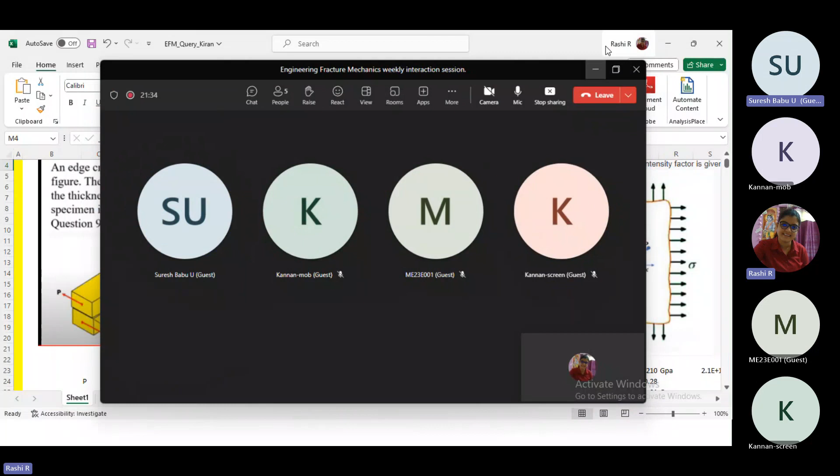Madam, at least the assignment questions also, are you finding it difficult? The chances are very high that I'm making mistakes. Who is this, Kiran or someone? Kiran sent me the one; it was very difficult for me to understand actually. So I understood that I'm making a lot of mistakes even during the teaching. That's why I'll probably take a couple more classes based on assignments only. Two assignments we'll try to complete, the ones which are left. I haven't figured it out because I have a lot of work going on. I'll let you guys know directly in the mail.

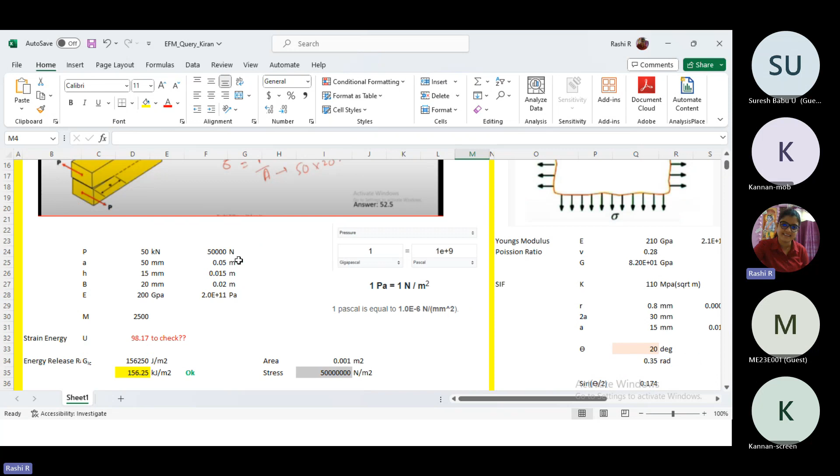I talked to NPTEL, but then I realized it is at least required to have a platform where if you guys have doubts, you can clarify among yourselves. So I thought, fine, I'll take the class. And then I realized in assignment 4 also I was making mistakes. I've made so many mistakes in this also. So let me complete this exam part first.

So where was I? You guys will be getting equations with the data sheet, and in that data sheet you will have all the equations. You will not be allowed to carry any written equations, and the questions will be very similar to the assignments you are solving, MCQs and numerical type. So if you solve all the assignment questions given, and I have other previous assignments also that I can share if you want, approximately 50 to 60% you will be able to score very easily.

And so I asked sir to take one class to clear the doubts. Sir said he will see whenever it's feasible. He was supposed to take at least one class. He said he will take it, and I don't know when. Did sir inform you guys anything regarding that? No, I think so, but he was giving answers for a few questions in the discussion forum, right?

Ma'am, there is a clarification here. So who is responding to our mails? I thought it's you. It is me, and then other TAs are there, but they are from mechanical. I am the one responding to your mails, but NPTEL admin also will respond. Technical responses come from myself or my colleagues, right? Not from sir. So we don't have any mails from sir.

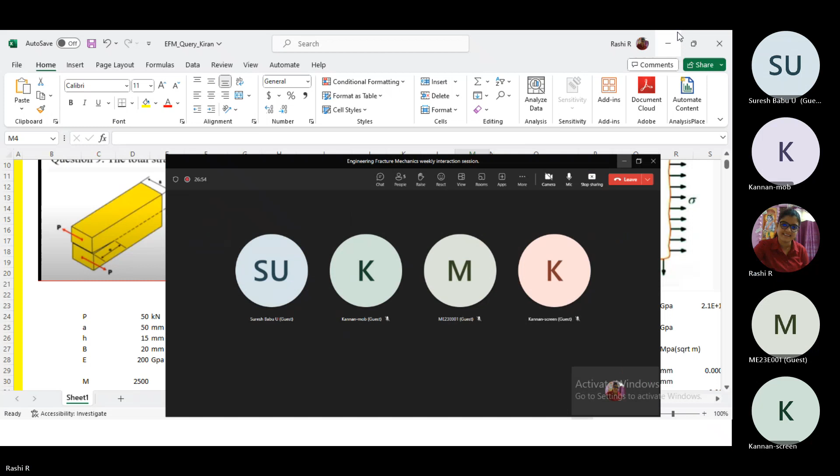In this, I got one clarification - I had a doubt regarding this one. Sorry, ma'am, on the exam part itself - the exam part I completed, right? I'll ask sir to take one more class there.

Yes, good, there are some clarifications in what you told. First thing, you told that they'll be providing some data sheets with the equations, right? Yes, with the equations related to the questions.

Mr. Khan, can you intervene, madam? Yes, please, please. Frankly speaking, I attended last year also, and of course I could not get through. Even me too, Suresh. That's what I'm coming to tell - there actually was no data provided last year.

In the previous semester, this subject was not there, but previously I have attended this. The questions were similar to this assignment itself. Whatever data was required, and some of the critical formulas, they were given in the question itself as part of the question. There was no separate booklet or something.

Like in week 10, some of the questions, actually the equation was also given, if you can see. Similar to that, they gave some of the equations too. Of course, that time I did not take it seriously, I just attended. This time I took it more seriously.

That's what. So continuing from Suresh Babu, we didn't get any data sheets for the questions, ma'am, but there were, as I told, equations for some of the questions, not for all.

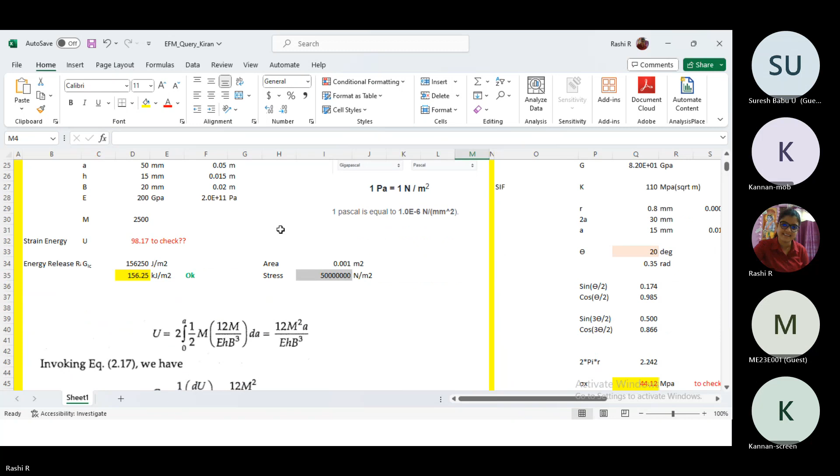Used here in this assignment, for instance, we have to use the problem equation which I have used is not correct. I have used strain energy equation, but we have to use strain energy release rate instead. For this equation we have to first find out... one second.

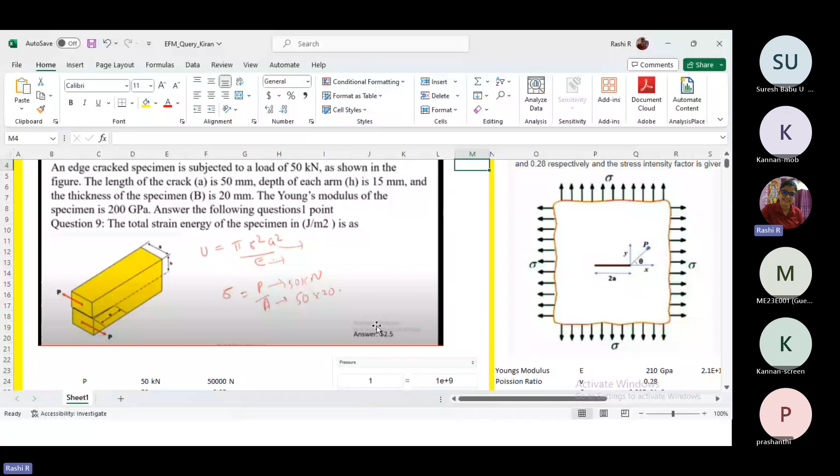So first we have to use strain energy release rate equation, and since the moment is not given, we have to find out moment is equal to P into A, and then we have to integrate it in this equation. Okay, so that's how I realized that I'm making a lot of mistakes actually.

Actually, madam, whatever if I go through the class notes, most of the things are coming from that. Yes, 70 to 80% if I just make it, we have to do the assignment.

So we can do that. Then we will just solve the assignment. We'll try to solve it, and we have previous assignment also. We'll discuss and do it. Then that's all I can do actually, because I'm using the equations in the wrong way.

That we shouldn't find first stress. First we have to find out the moment, and then we have to integrate it, and then we have to find out the strain energy release rate using that equation.

Actually this fourth assignment is very... even for every week, I could able to do it immediately, but I am forgetting the previous ones. Yeah, exactly, that is a problem. When I was doing the fourth week assignment, I was remembering the equations and all, and when I come to sixth week, I'm forgetting what is happening in fourth week. I'm not even able to solve or try to understand what is wrong there also.

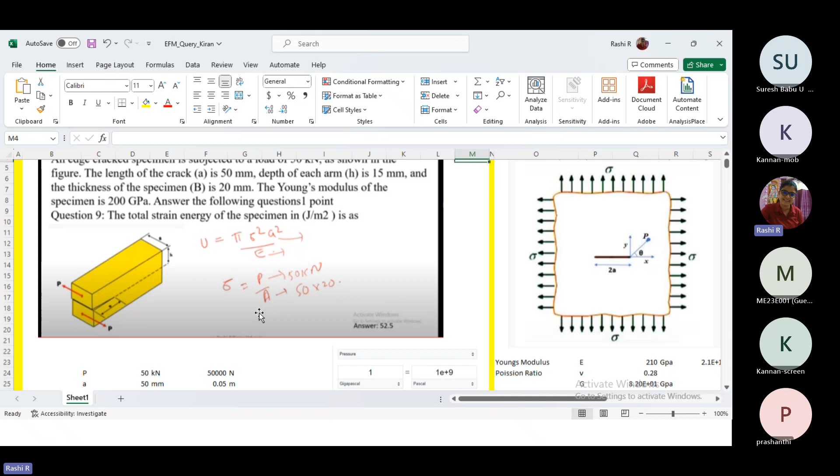So that's where I realized. So that's how we have to do it first anyway, moment we have to use, we have to integrate it.

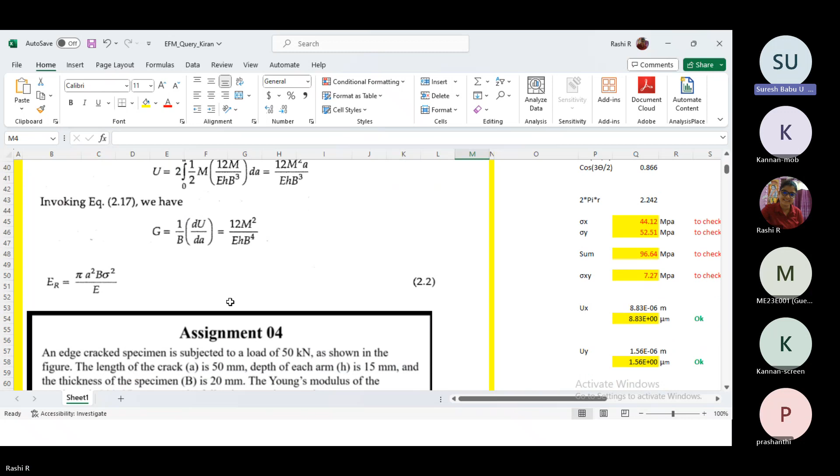Present assignment, I think you are asked not to discuss, is it? Otherwise that may be easy a little. No, you guys can discuss, man. If you guys want, you can discuss, it's fine. The present assignment we can discuss maybe to some extent.

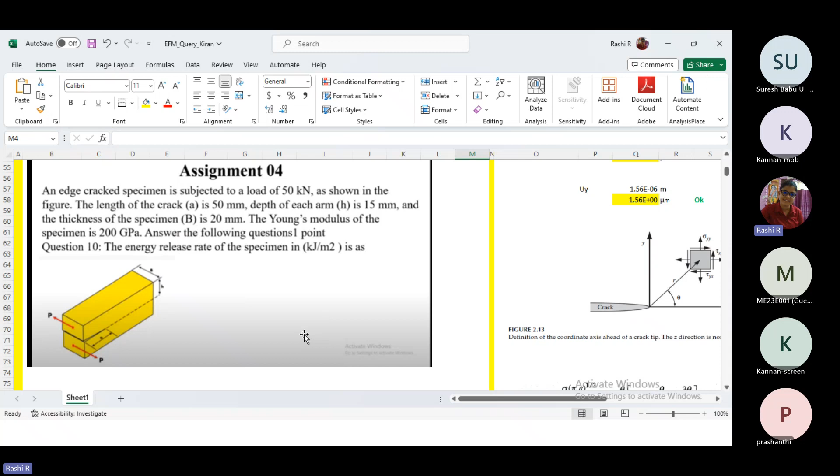I have not prepared though. I just wanted to tell you guys regarding this exam, and then one more thing is here R is in radius. So this was the doubts that you guys had.

So R, radius, is in millimeter, we have to convert it to meters and then do the assignment. So keep an eye on the units when you guys do it. R should be in meters, by the way.

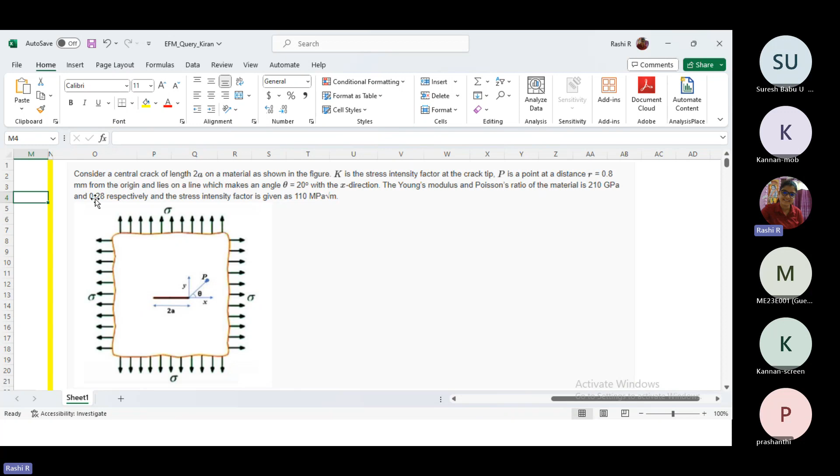Is it really the fourth assignment? This one, I think so, it is fourth or fifth. No, it's not fourth. No, I'm just discussing the problem doubts you guys had. Sorry to interrupt.

Please allow me to tell some. So before going to these assignments and problems, please let us have this session every week. We only have 4 weeks, so please support us.

See, that's what I was telling. I'm really bad at solving because I'm having difficulty keeping track of the equations every week. First I have to go through the complete week, and then I have to probably teach it.

That's what I was telling, we'll solve together. Yeah, that's good. According to sir, if we solve the assignments, about 50 to 60% of the marks we will be able to score. So we will.

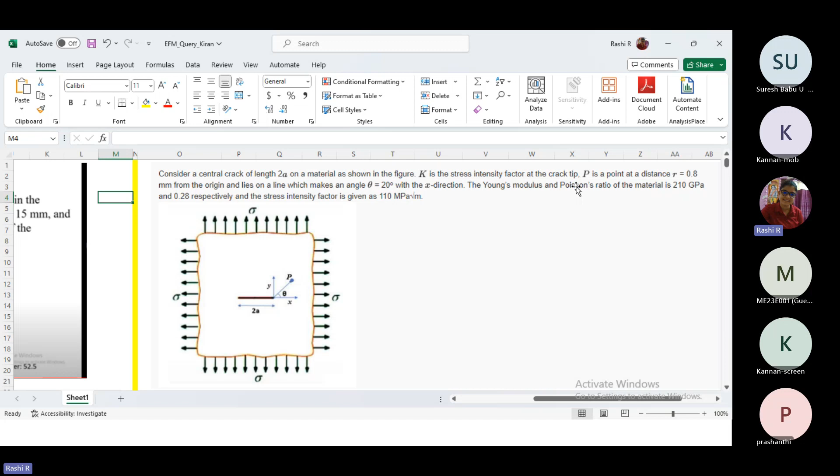I'll take the class, I'll start, and if I'm making any mistakes, I want you guys to please say and have discussion properly, then we'll just solve it in the class only. Because previously I have made mistakes and no one pointed it out, that's why.

Everybody is learning, ma'am. So you guys should be able to do this one at least. Come on, I made a mistake here and you guys kept quiet.

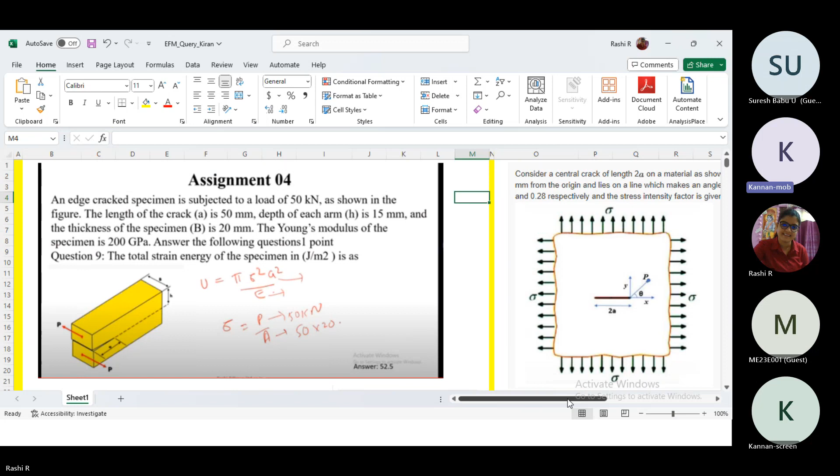Okay ma'am, we'll see ma'am, we'll do it together ma'am. Yes, but that's what I wanted, please. If we can discuss, it's fine. Present assignment also we'll discuss. It's okay, if you guys have any doubts, you can discuss among yourselves.

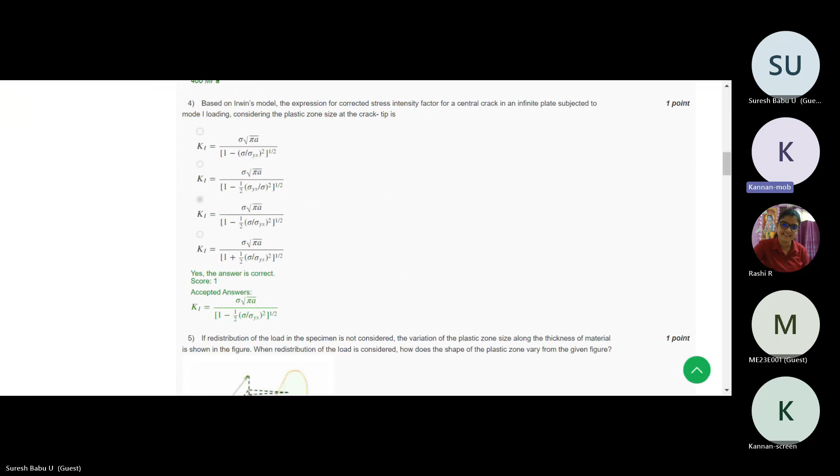Exactly. Yeah, correct. I understand now. Up to some certain thickness, this K1C is more. Fracture toughness is more. That is plane stress. So it's always more than plane strain. So this is how I exactly correlate. Thank you. Good.

Shall I go back? Yes, Suresh, next question. My understanding is right now. Kannan, you were telling something? Yeah, my understanding is correct, whatever I conveyed, right? No, it is correct. Up to this much I can say, but when it comes to equations, I'm lost. I'm sorry. That's okay. I'm lost in each and every question, ma'am. No worries. I'm not changing my answer. Kannan, I don't think so.

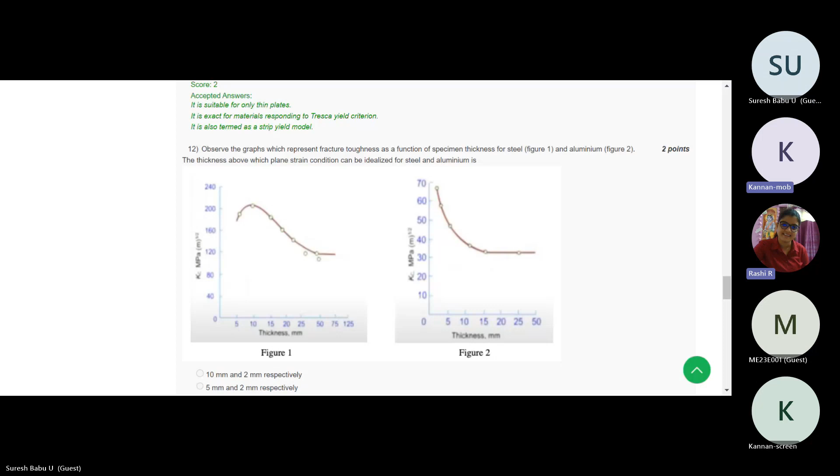Okay, next question. Third is: residual strength diagram for a thin cracked panel is plotted between. It is not seen, Suresh. You have changed question number 3. Are you able to see, Kannan and Rashi? No, ma'am, it's only half. Suresh, connection issue is there. Okay, I will stop sharing and share once again.

Ma'am, to be honest, it takes almost 2 hours to complete the test for me. Week 9 and week 10, it took 2 hours for completing the test. 2 hours, that's it. Kannan, believe me or not, when I was preparing for the class, I was spending more than 8 hours for preparation. That's what we need to do, ma'am. Preparing for a class is different; taking an open book test is different. Yeah, that is also true. That's why we need you. Thank you.

Yes, Suresh. Can you see my screen? Yes, we can see. This is question number 3: residual strength diagram for thin cracked panel. It is between stress and crack length. This plot is plotted between stress and crack length. I feel this is the correct answer.

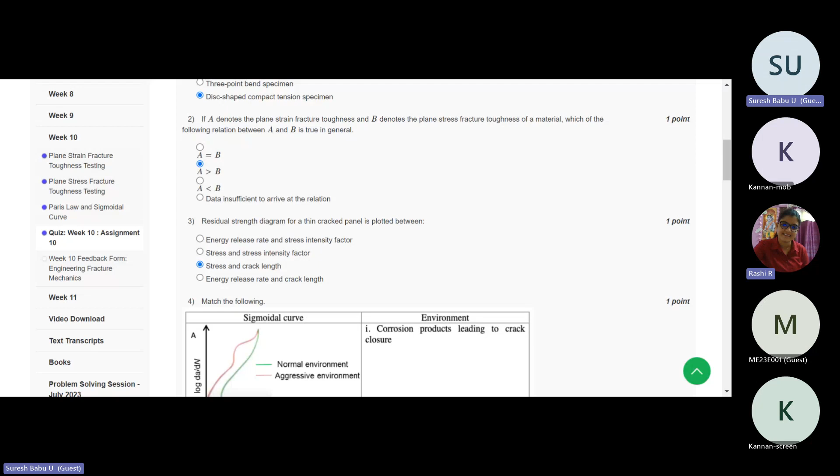Anything you want to discuss? I cannot explain more than this; it is there like that. From next time onwards, I will get the answers, guys. If I'm wrong, then we can discuss more. I also did not come prepared for this, otherwise I may be a little more prepared. It is fine, Suresh. At least we'll go through the questions, or else whichever you are having doubt on, we can discuss. And if any metallurgy related question comes, I can give my viewpoint also.

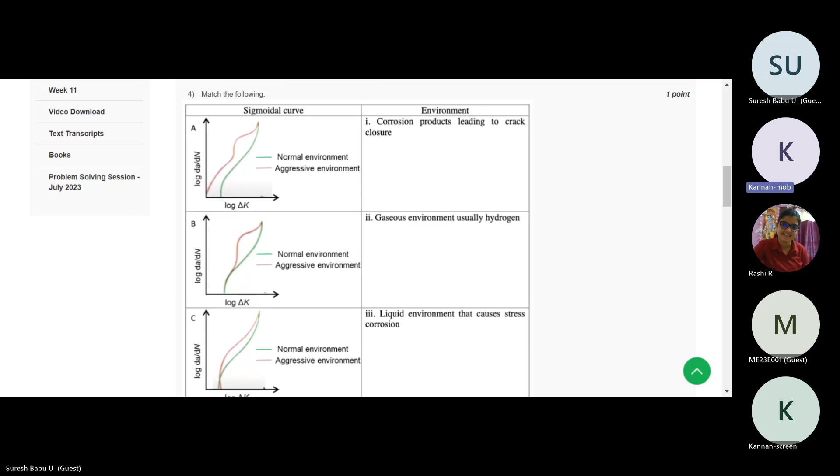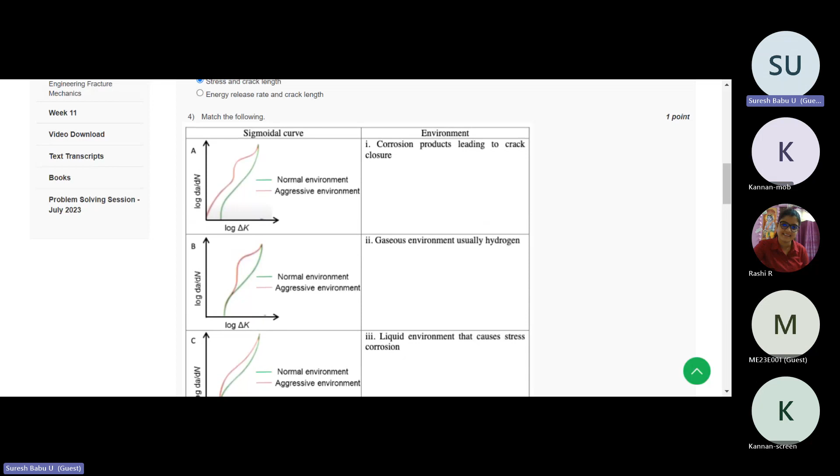Mr. Kannan, this fourth question you are clear? Fourth question, I didn't answer because I still have one week's lesson to complete. Are you not submitting these assignments regularly? My plan is to submit tomorrow. Okay. This one I could answer; it is a very straightforward answer. And the fifth is also very clear. I could get the answer directly from the notes. Hold on for 1 minute, Suresh. Identify correct statement regarding plane stress.

It's okay, I'll go through the lectures again and come back to you. Actually, from the lecture, a stable fracture precedes the catastrophic failure. These things I took from the notes. Excuse me, ma'am. In the question, there is no need of chevron notch because it is used for plane strain condition. Correct, chevron notch is not required. And also in the fifth question, the third option will also be correct. He mentioned it in the lectures.

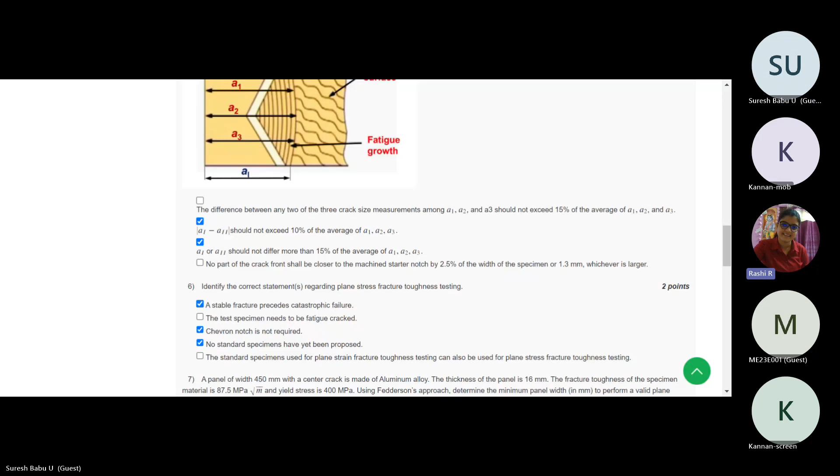The fifth question: no part of the crack front shall be closer to the machined notch. Is it? Yeah, he mentioned it in one of the first lectures, I think. Go through the notes once. Suresh, can you show me the question? I'll try to see it. 1 second, this is question number 5. It's okay, I'm seeing it in my laptop.

That point I could not find: no part of the crack front shall be closer to the machined starter notch than 2.5% of the width of the specimen. In the diagram, he mentioned that width is 0.025 W or 1.3 mm, larger of the two. You can go through the diagram which is just beside this diagram. Yes, okay, I will go through that. I have only noted whatever he has mentioned in the PPT. Okay, that I will go through.

Suresh, I don't think just going through the PPT is going to help you with understanding the lectures. You have to go through the classes because the PPTs are just a transcript of the classes. It will be easier for you if you see the class first, try to understand, and then go through the PPTs. Yes, madam, I'm doing that. Sir will teach even better in the class actually. Okay, madam, I will try to do that more seriously. As of now, I am trying to listen to the class completely once. I was there during that time, only I was noting down the points.

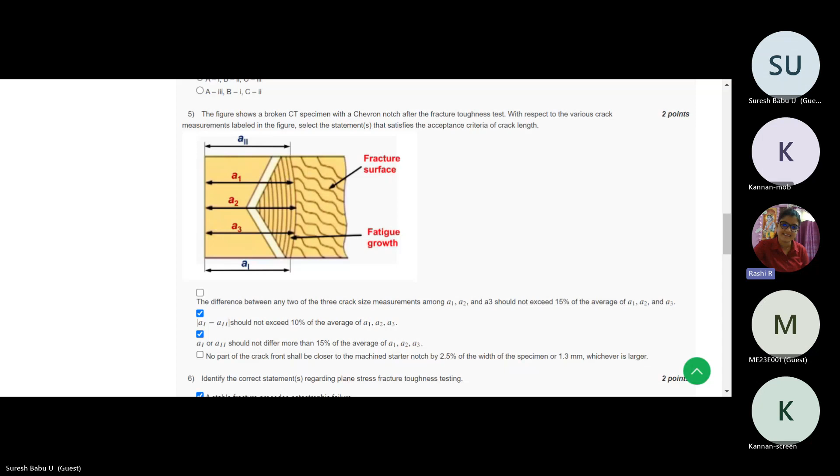During the class itself, try to note down the points, and other assignments also I'll give to you guys. We can solve especially the MCQs part and the question paper part, and have a discussion so you get a little practice. Sir will usually tell along in the class itself, he'll give the answers, and it will usually not be there in the PPT. So it is a little difficult to get; you have to make notes while studying.

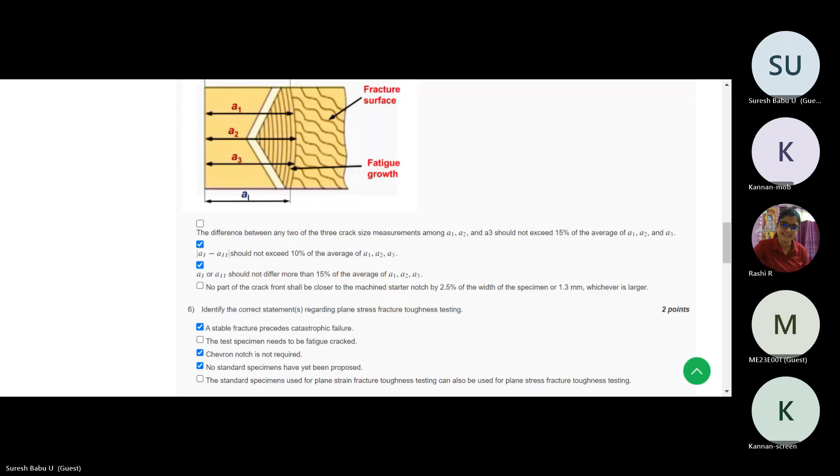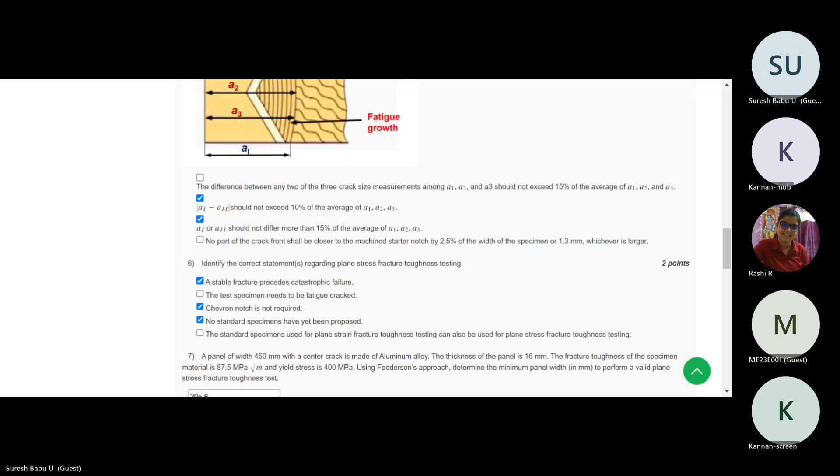Shall we go to the next question? 6th is clear, no? Yes. Madam, I don't know who all are participating in this. Mr. Kannan. Okay. Coming to 7th. Panel of width 450 mm. Mr. Kannan, do you know how to answer this? To be honest, no, I didn't take that so far. Maybe he hasn't completed the class yet, Suresh.

Actually, I could find one formula and I took that formula. 7th question is correct, I got the same answer. W minimum is 27 by 2 pi under root K1C by sigma ys. The same formula I took, and with that I got this value. But it's K1C by sigma ys whole square. Correct, that formula is there. Okay, then I feel this is correct. You can go to the next question, Suresh.

This question I really find tough. The electron microscope fractography at a magnification of 2500x, taken at 7.5, 12, and 25 mm from the crack's origin, shows regular striations. There are 25, 15, and 5 striations per 25 mm in the 3 fractographs respectively. Initial crack length is 3 mm and the final crack length at failure is 50 mm. Assume average striation spacing as 0.4 × 10^-3 mm and 2 × 10^-3 mm when the crack grows from 3 mm to 7.5 and from 25 to 50 mm respectively. Madam, I could not find much on this in the lecture.

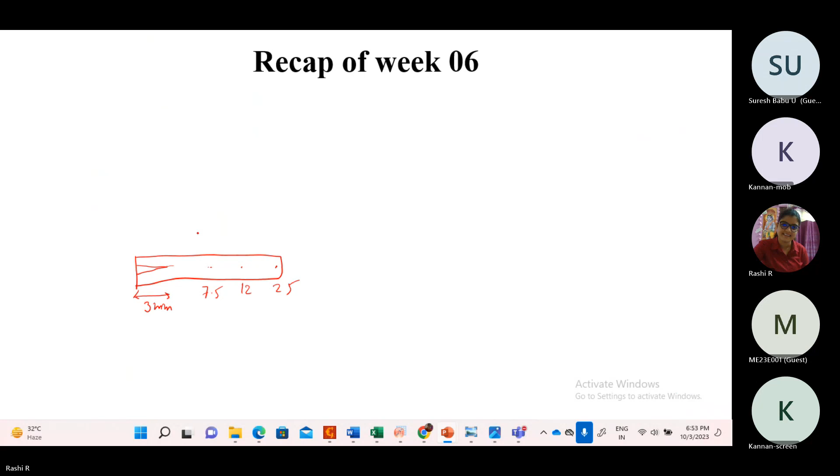From the crack's origin, it shows regular striations. So the crack's origin is this one, right? It will start crack forming from here. Yes, so it will be having striations here. And there are 25, 15, and 5 striations. So here there were many striations per 25 mm. 50, no? Failure crack length was 50.

Is it required to be indicated here? One second, let me see. Even I don't know. There are 25, 15, and then 5 striations per 25 mm, right? So when you're taking 25 mm length, you're finding 25 striations, 15 striations and 5 striations with this distance.

You are telling Suresh something? No, the final crack length was 50 mm. So it doesn't matter, right? We are saying beyond 50, right? The initial crack length is 3 mm, and the final crack length, failure has happened at 50 mm. So here it is 50. So I don't think it has anything to do with it.

Maybe for other questions it is there, but assume average striation spacing is 0.4 × 10^-3 mm and 2 × 10^-3 mm when the crack grows from 3 to 7.5 and 25 to 50, respectively. Assuming striation spacing to be average in the middle zone, what is the actual spacing in mm at 7.5 mm?

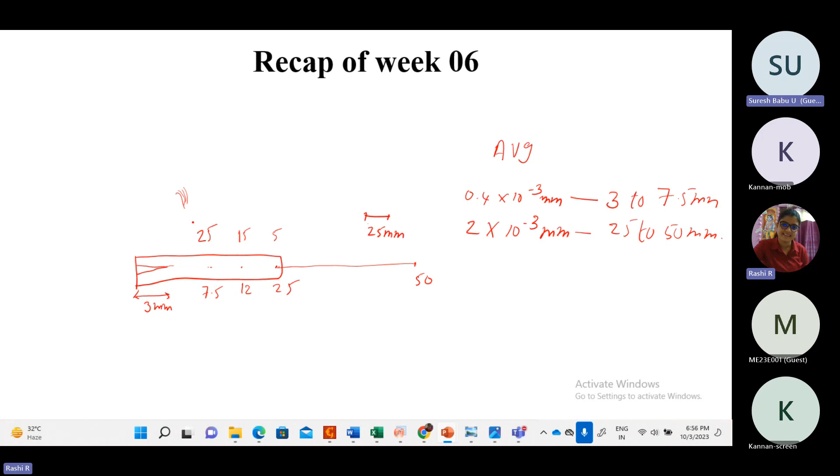So it's 25 to 15. So between every 0.4 × 10^-3 mm, you are able to find one striation. This is what average means, right? In this total distance from 3 to 7.5, if we subtract, it will be 3.5, right? No, 4.5. So the average spacing is this one in this region. Total distance is this one, so we'll be able to find out how many striations are in this whole region.

25 striations? No. In this region, they have said at 7.5 we are able to find 25 striations per 25 mm. So we have to find out how striations will be more concentrated in this region and become less as we go away from the crack tip, right? So it will be more closely spaced, and at the end it will have a lot of distance. Is it correct, guys? Or it will be more here and less here.

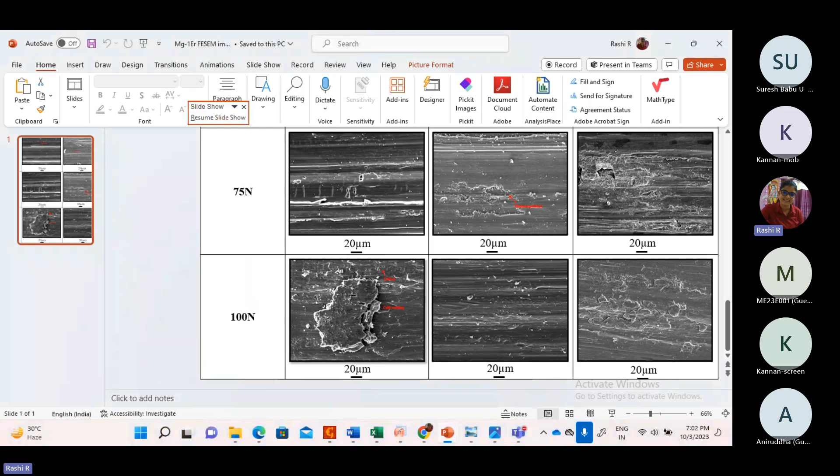I have anyway here one microstructure. So if I'm seeing one microstructure here, you guys are able to see microstructure? Yes ma'am. So this is at what magnification, I don't know, but here it is 20 micron. So in 20 micron, I'm able to see some scratches. Consider any scratches.

Are you guys able to see my mouse cursor? Yes. Okay, I'm not able to see that. Anyway, so here the 20 micrometer is the scale that I have given down, that corresponds to 20 micron. But then if I see in actual, the total size of the one picture is approximately what, like it will be around 5 centimeter at least.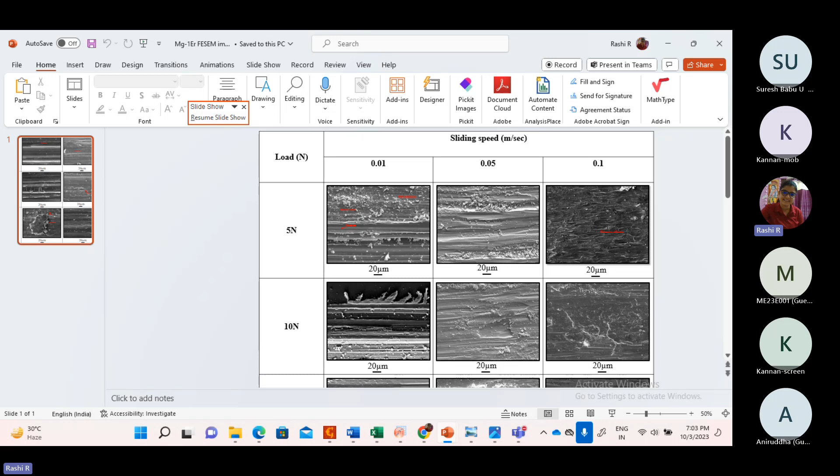So if I magnify further, so now it is even more higher, right? So the magnification in which sir has given this is 25 mm, so that is at 2500x. So in actual, what is the size of that one?

You have to find out the length, and then they are giving 25 striations in that particular length. And if we divide the actual length by 25, we'll be able to find the actual striation spacing. So 2500x means we are magnifying 2500 times.

So if it is 1 micron, you'll be able to see it as 2500 microns. So if you are seeing 25 mm, that 25 mm will correspond to 2500, divided by 2500, it will be 0.01 mm.

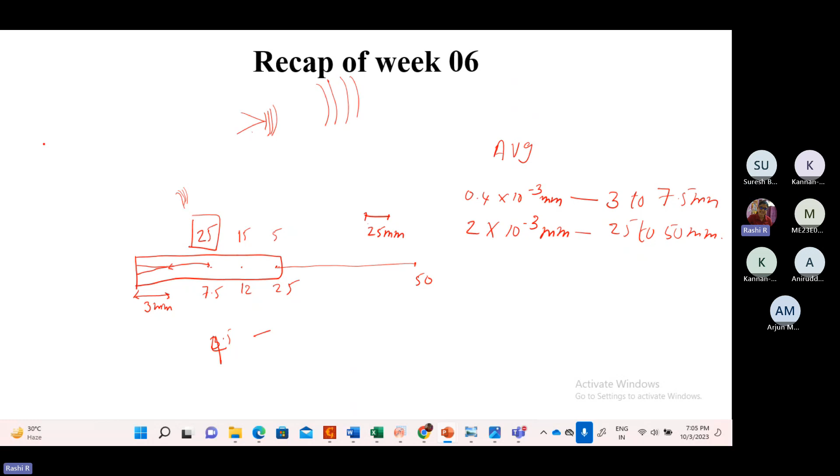So we have to find the spacing also in mm only. So in 0.01 mm, we are able to find 25 striations. So 25 mm at 2500x. So at one magnification, 1x, this will correspond to 0.01 mm. So in this 0.01 mm, we are able to find out 25 striations.

25 striations are there. So if 25 striations are there between two spacing, for one striation, how much space does it take if you find out? Is it the actual spacing?

It will come out to be 4 into 10 power minus 3... so this will correspond to 40 into 10 power minus 3, means 0... no, 0.4, not 40, sorry.

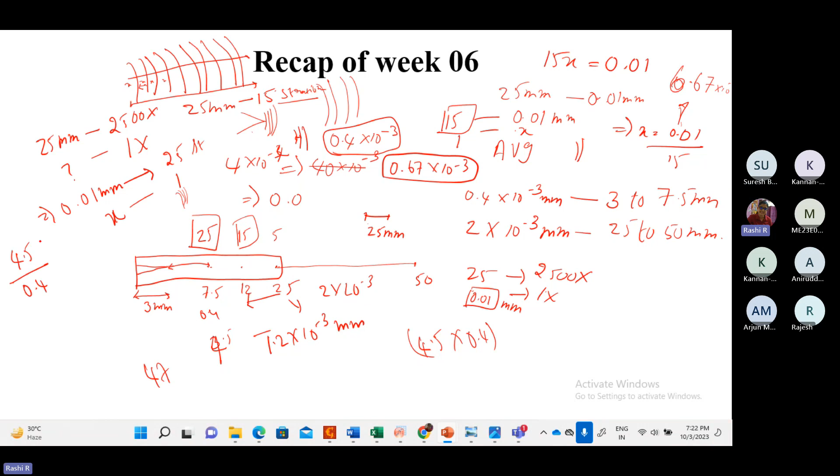We'll get total striations plus... 7.5, 25 minus 7.5 gives 17.5. 17.5 divided by 1.2 into 10 power minus 3, plus 25 divided by 2 into 10 power minus 3.

It is what, 38333, ma'am? 38? 333, so many striations, 41,000. Okay, let me check back my question. So these many striations will be there, and then these many cycles will be done.

Yeah, you guys can discuss now. Suresh, please discuss the next question, the 12th question. From the lecture, at this point it was mentioned, 0.8 kq.

Am I audible? Suresh, I can hear you. Yes, actually in the very first lecture of this week, on fatigue pre-cracking restrictions, it was mentioned that during any stage of the fatigue crack growth, Kmax shall not exceed 0.8kq. From that point, I took this answer - 0.8 kq I have got.

Any comment? Yes, that should be correct. Actually it is mentioned in the video, in the first lecture. I think it should be correct.

And question 13 also it is mentioned, 0.6 kq, correct, in the same place, maybe immediately there itself. Yes, last, 2.5% of crack length should be loaded such that Kmax should be less than 0.6 kq by E. Correct, 0.32, correct. Okay, is this answer second, no? Yeah, second answer. Coming to 14th.

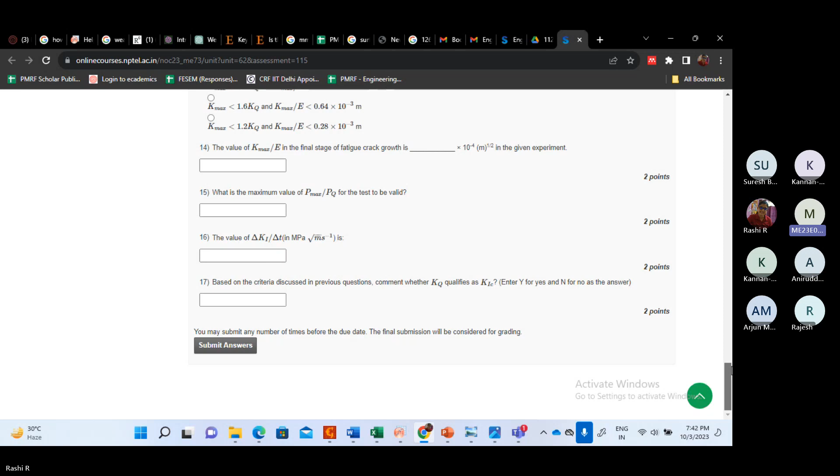Madam, actually for the 14th question, I'm getting now 1.43 something, can someone cross verify? 14th question. Suresh, how much did you get? No madam, I got 3.2, but I will check, I have to do calculation. Suresh, at least can you tell how it has to be done so that it can be followed?

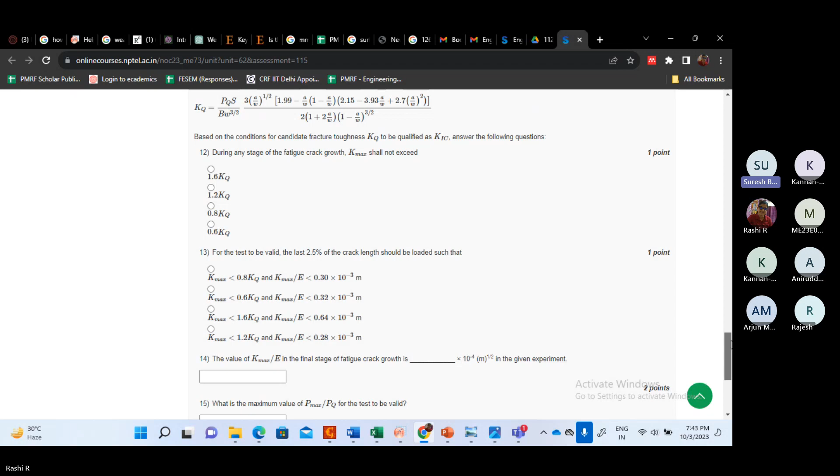Madam, it is actually in the formula, the formula is given, we have just simply substituted, that's all. The value of K, okay. Madam, this K, I really lost the idea, how I got 3 I don't know. Just some rough calculation I have done and put, no, I cannot say anything on this 14th question.

No, maybe it is straightforward only. Instead, in the place of PQ, sorry, in the place of PQ we have to put P max of 32 kilonewton. Just now somebody told we have to use this value, 32 kilonewton, maybe that should be the right one. 3000 cycles, correct, yeah. 32,000 into the test value divided by P, yes, BW, yeah, I think now madam, we have to recollect, use that formula and divide it by E. I think the person who gave us the answer could clarify that one.

No madam, coming to the 13th question, you see that K max, in option 2, whichever we found, it is correct. K max should be less than 0.6 kq and K max by E should be less than 0.32 into 10 to the power of minus 3.

Yes. So then whatever is given, 0.32 here, I have simply copied. No, I don't think so. 0.32? We have to write the actual value. The final stage, that too, it is given as 10 to the power minus 4. We should be careful there also. Correct, because it is given 3.2 into 10 to the power of minus 4. Because the answer is in 10 to the power minus 4, I have simply kept 3.2. No, maybe we need to calculate using the load values.

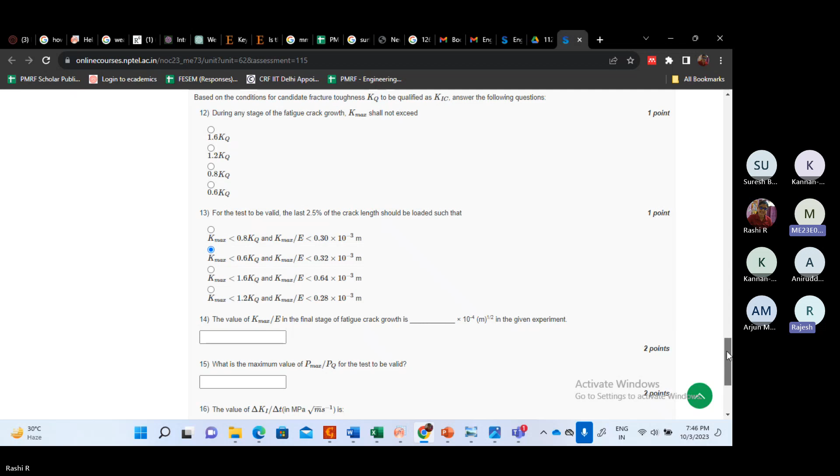1.4 divided by the E value, Young's modulus? Yes, I'm getting 1.43 into 10 power minus 4. Yeah, it is obviously less than 0.32 into 10 power minus 3. Yeah, actually, I used the formula above. Instead of that PQ, I just put P max. Yeah, I calculated the same way too. P max is 32 kilonewton. Modulus value I have just used. Yeah, same thing. Yes.

P max, why I considered it is that it is the maximum load at 50,000 cycles. I don't know whether that is the right one or not. Yeah, here they mentioned that the final stage of fatigue crack growth was conducted for 50,000 cycles at P max of 32 kilonewtons. So they asked in the question also about the final stage. So it should be P max is 32 kilonewton.

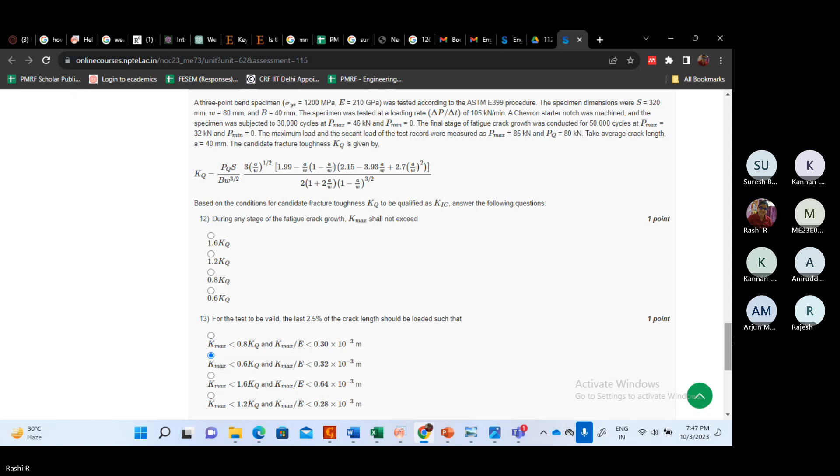I think in this one, a lot of queries are there. Is it possible to share this answer sheet after this assignment? This one will come, right? The scores are released now. Yes, I'll see again. Help us for the main exam. Yeah, that's what I was telling in the class from the beginning. I'll try to discuss, but whenever I'm doing wrong, I want you guys to correct me, because in previous classes and during the assignment solution also, I've used the equations wrong and you guys did not tell me. That's why I thought I'll first study and then next time I'll take the class. So yeah, I'll try to discuss it, but you guys have to tell me if I'm going wrong anywhere.

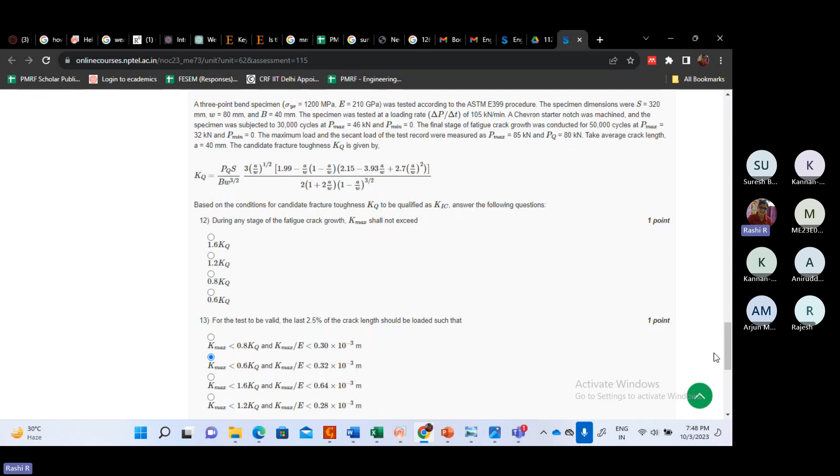Okay, we'll also come prepared. Yes. We will have a discussion rather, because we'll try to sit and solve the equations, and we'll be solving from next class onwards. Because I thought I'm still not prepared for this. I thought to drop this course, but then I realized at least let there be a platform where you can discuss the doubts you have. That's why I'm taking the class. Yes, absolutely. Last year also we did not have this platform. Actually, there was no review like this for the same subject.

So this question I'll try to solve next time. Next class we'll try to solve this question. Yes. The last question, I'll start with this one and then we will discuss the next assignment in the next class. If you don't mind, we want the answer above. This one? Above, the electron microscope one? Yeah. Yeah, we were discussing this one as well, the electron microscopy one.

And I was thinking that 25 mm was at 2500 magnification, but Arjun or Kannan was telling that for 25 mm, these many striations are there. But for the total number of cycles, we have to take the average present, and for the distance from 3 to 7.5, the average is 0.4 into 10 power minus 3 mm.

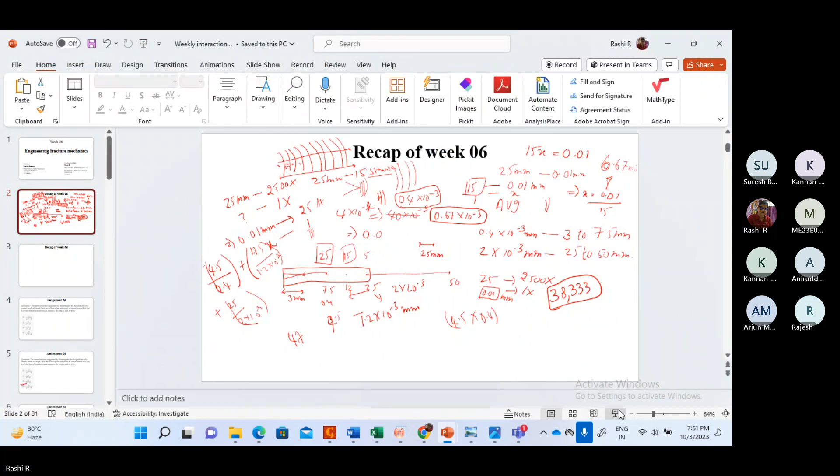38,333. So this is, yes. 4.5 into this one, and 10 power minus 3 will be there. It is around 38,000 cycles.

So this one, the actual striation spacing, I was under the impression that 25 is at 2500 magnification. So you have to convert it to the original actual value, that will be for 1x. So for 2500x, if it is 25, for 1x how much it will be, you have to find out. And then it will come out to be 0.01 mm.

And then in 0.01 mm, if you have 25 striations, for one striation how much will it be? So it was coming around 0.4 into 10 power minus 3. But Kannan was telling that is not how it is. But Kannan, I think this is 25 at magnification only, because it is given here that in 3 fractographies respectively. Fractographies means the SEM images. The images will be looking similar to this one.

Kannan, are you there? Yes, ma'am, I'm here. I think so, Kannan. This 25 mm is at 2500 magnification. I am guessing that. I'm unable to grasp this. The reason why I'm telling is because for 25 mm, 25 striations are very less.

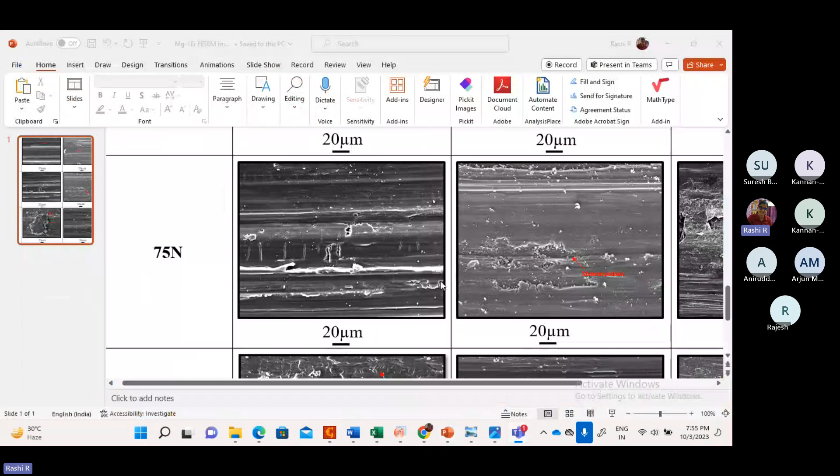Fine. Rajesh, fine, sir. I don't know. Most of you guys are elder than me, so I don't know. No, it's okay. I'm not sure.

Yeah, if we can see the actual answer sheet, then only we can get some idea. That is also true. We have to see the answer sheet and then find out whether it is correct or not. So this is the answer for now. We got 0.4 into 10 power minus 3 at 7.5 and 0.67 into 10 power minus 3 at 12, and at 25 we have to convert it again, and I'll just do it for 25 also.

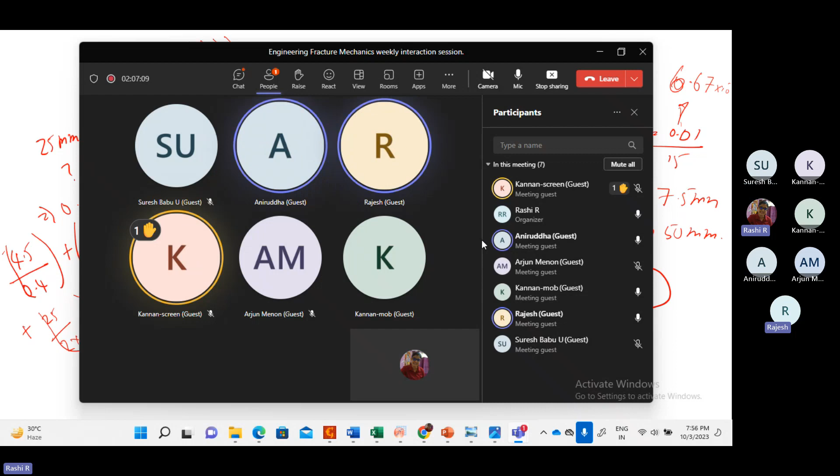Last question, ma'am. If we go to that option number 2, insufficient data. This is not insufficient data. I was telling this one to Suresh also. Yes. I mean, we had a discussion and we thought it was not insufficient because fracture toughness will be higher for plane stress conditions. Okay. And then lower for plane strain condition. Okay. Yes, Kannan was also saying the same thing.

Correct. And option 2. I don't know what is the name of the girl who is here today. Like, I mean, she was in ME something. She left. Okay. She was telling it. Yes, Aniruddha.

My question is regarding examination. Madam, that curve is actually fracture toughness as a function of specimen thickness. Yes. So initially, in the initial case, it will be having plane stress condition, right? Yes. And later on, it will be plane strain. Yes. Actually, there are two curves given. One is steel and the other one is for aluminum. Any curve if you take, on the x-axis it is given the thickness of the specimen. Initially it was high, and afterwards it came down.

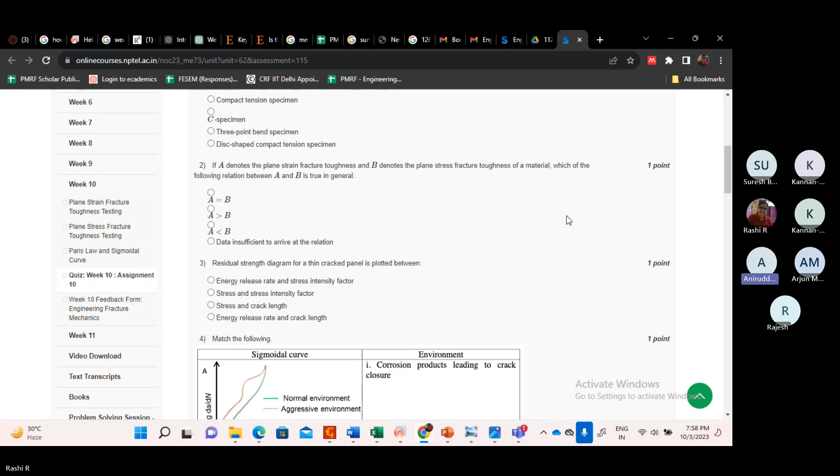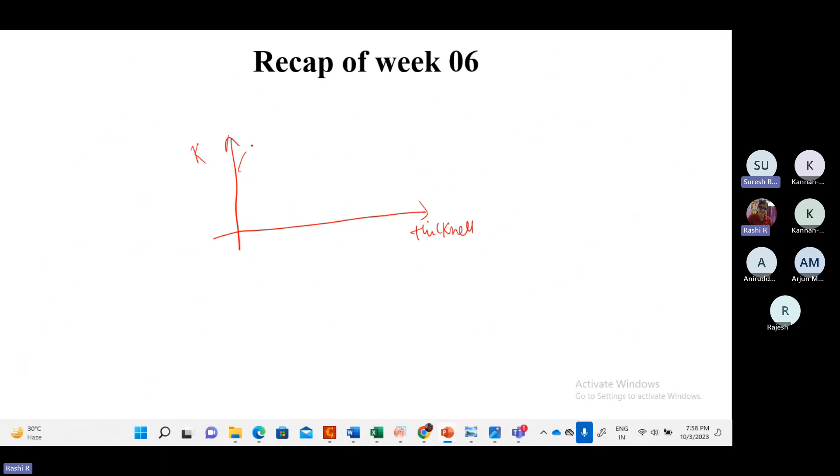And even in previous video lectures also, sir has been constantly telling about this, like the fracture toughness in plane stress will always be higher than the plane strain condition. So he has always been mentioning about it. Mm. I think so. It will increase and then decrease. It will become constant. Yes.

Okay, good. Really, it is tough to maintain that focus for the entire lecture. Correct. Sometimes we will not be in a position to catch the point sir is making, unless we focus again and again. Not a one-time job. Repetitions are required. Yeah, that is true actually. And it's not like sir is providing slides or anything at the same time. So only the transcript is present, that's all.

Correct. Regarding any prescribed book, sir said whatever transcript is given is more than enough for this course. Maybe for this course, true, but ma'am, there are two good books. One is Elements of Fracture Mechanics by Prashant Kumar, and another book is Fracture Mechanics by T.L. Anderson. These two books are standard books for this subject. Even I heard of Anderson actually. Anderson is also good, but it is a little elaborate. I think if we join a proper MTech course, then we can read it thoroughly.

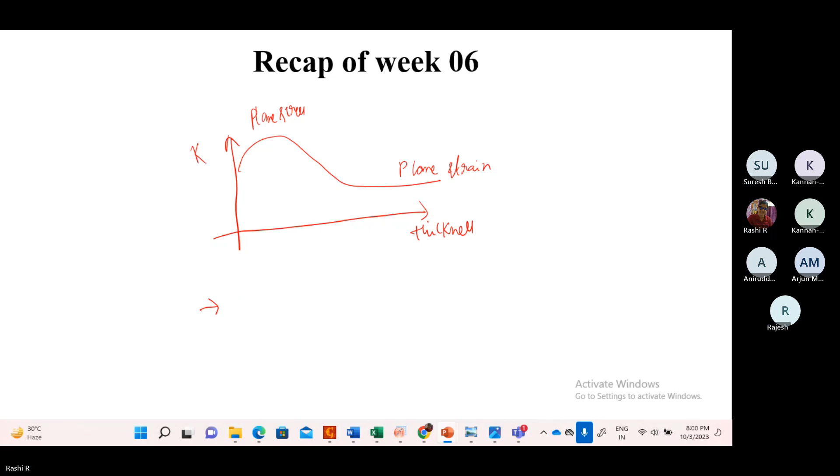No, I am from VTU only. I did my MTech long back in 2012. That's what I remember. That's it, Anirudh. Anything else?

I want to ask one thing about the examination. In one of the lectures, sir mentioned that we can take the formulas in one sheet and bring it to the examination. Yes, I was discussing regarding this. One second, I'll read out the message sir said. Actually, the lectures were very old ones. Okay. So, sir said, data sheet with relevant equations will be provided. They need not carry any written equations. Okay. So I don't think so. The data sheet will be given, I think, along with the question only.

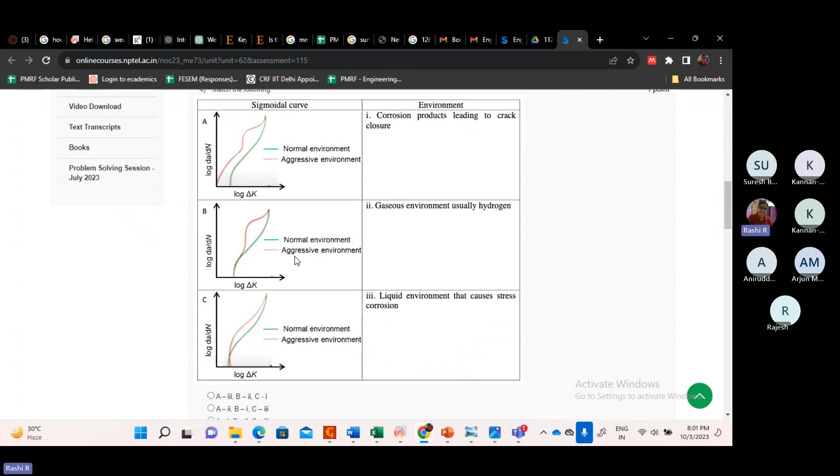If the equation is required, relevant, then sir will provide the equation. But you cannot rely on that. Simple equations you guys have to remember. The difficult ones, like the one which we had at the end, right? Correct. Those type of equations sir might give, but not the small equations. Those things we have to remember, like fracture toughness. Paris law. Yeah, Paris law, whatever law.

In the online exam, actually they don't allow even calculators. Like when you appear for GATE or something else like JE. Yes, a calculator will be given to you on the online screen. You have to use that. They don't allow a separate scientific calculator. Okay. I've told those instructions in the beginning of this class. You guys can listen to this lecture.